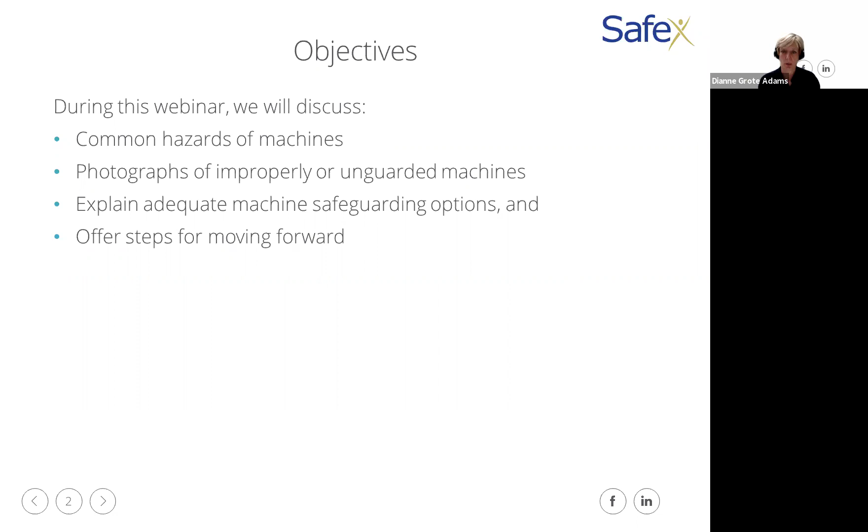But anyway, I'm going to hit some of the common hazards of machines. We're going to have some photographs of some unguarded machines. I'm going to run through the adequate machine safeguarding options, because I always get confused, what in the world is a safeguarding option? And then maybe some ideas to help you move forward. You know me, I always like to challenge you to do something.

So why should we guard? Well, obviously we're trying to prevent injuries and deaths, right? And there is a fair number: 800 deaths are attributed to lack of machine guarding, and more than 9,000 injuries. The other thing I don't normally talk about, because I don't do workers' compensation, but I thought was worth mentioning, we do have Ohio Administrative Code that actually lists some machine guarding requirements in the safety requirements for the state.

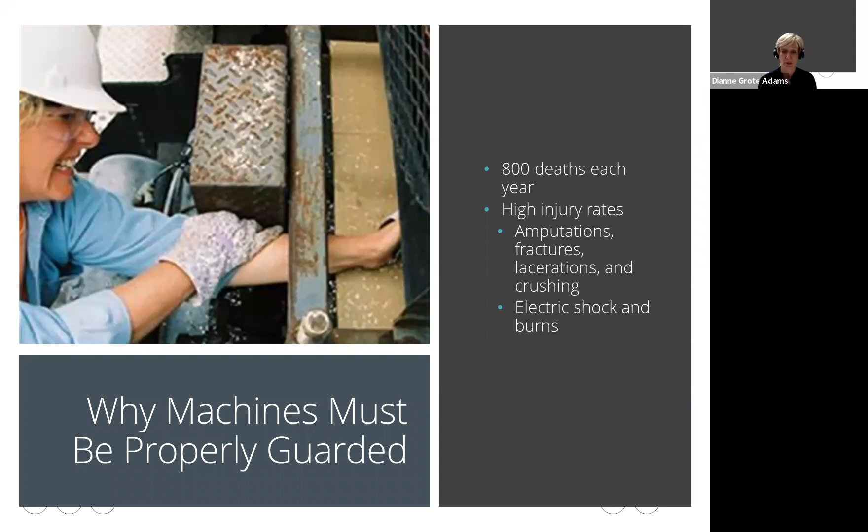Should you have a poorly designed machine and an employee was injured, there is that problem, that potential for a VSSR that could be filed as well. So there is a cost to this as well, beyond just the basic injuries.

But I'm going to focus today primarily on the OSHA standards, because you know me, that's what I'm all about, right? That and beyond just the OSHA requirements.

So 1910-211 gives you a bunch of definitions. I'm not reading them to you. 1910-212, though, is the general requirements, and that's what I'm going to focus on today.

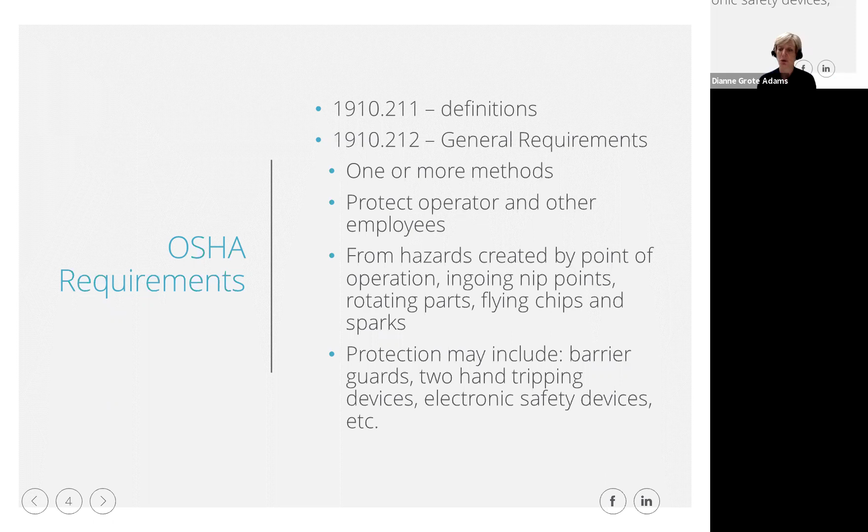They say in the OSHA standard, hey, we should use one or more methods to protect our workers. And we should make sure that we're protecting from any hazards created by point of operation, ingoing or in running, however you call that, nip points, rotating parts, flying chips, and sparks. And then finally, you can look at using barrier guards, two-hand tripping devices, electronic safety devices, a variety of things to make sure that we're protecting our workers.

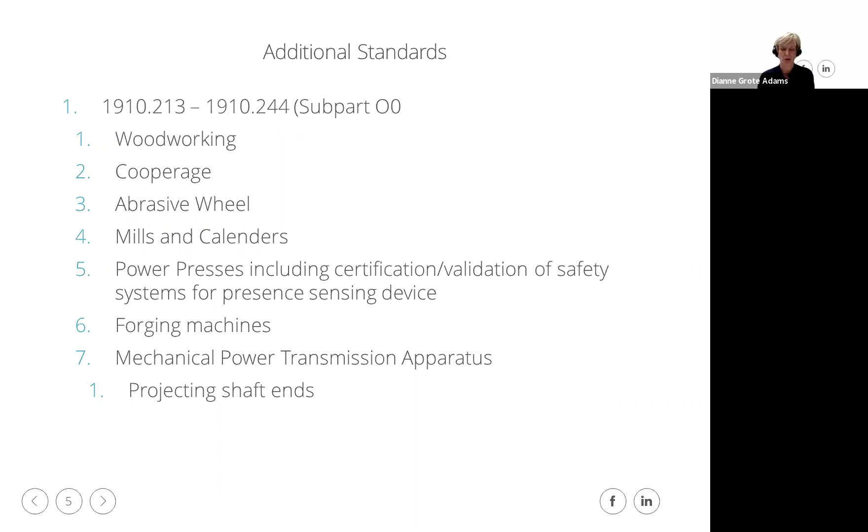There are some additional standards that are more specific. We're not going to cover that today, because obviously the BWC even offers machine guarding classes, and it's way more than 1 hour. So we're not going to do this, but if you have this equipment, you want to probably go look at those specific standards to supplement what I'm talking about today.

All right, so in the chat, real quick: if the machine is old or you're using it as the manufacturer sold it to you, is the safeguarding always satisfactory? True or false? Quick in the chat. Well, let me see what you think.

So if you've got an old piece of machinery that's been around since the company started, or you bought something last week, but this is the way the manufacturer sent it, it's always adequate, right? Correct. You guys are all good.

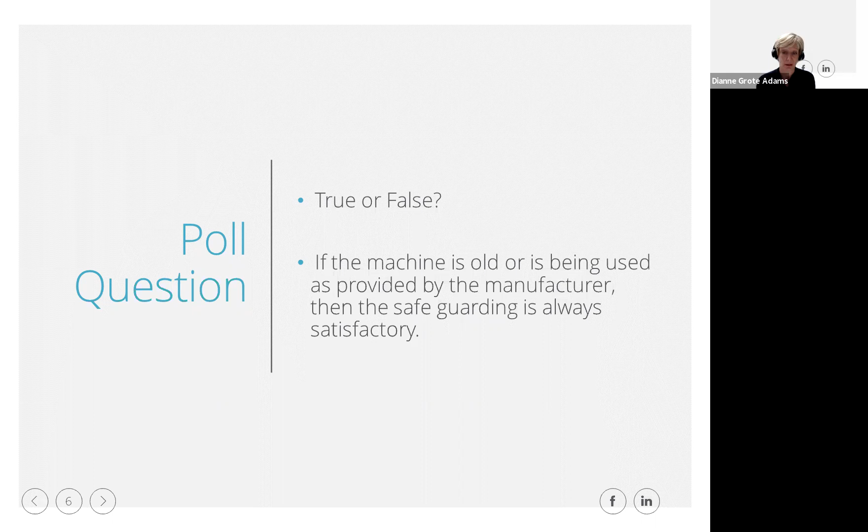False, false, false, false. OSHA doesn't regulate the manufacturers. And yes, I find that frustrating as well. But we all should know that it is our responsibility as the employers to make sure that our equipment is adequately guarded. And sometimes, depending on who's involved or the age of the machine, they may not have purchased the guarding package that comes with a piece of machinery.

So the part that always confuses me when I start hearing the terminology around safety and guarding is safeguards. What is the difference? So there are actually 5 different classifications that OSHA refers to, and that generally health and safety folks are going to refer to.

So we have safeguard barriers, which they actually prevent you from reaching the moving parts. And I think that's what most of us are more familiar with when we think about machine safeguarding.

But then you might have a safeguarding device, such as a pressure sensing device, like a mat or something that you would step on, that keeps the machine from operating unless that contact is being made, or sometimes in reverse, stops the machine from working.

We might look at location and distance, like I can't physically reach that, right? Like for example, if it's higher than 7 feet, we don't have to guard it because we can't access it. So that's location and distance.

Then we might have auto feed and ejection, where we actually have the machine automatically moving the part in and then ejecting the part so that the employee doesn't have to come in with contact with the point of operation.

And then finally, there's miscellaneous things like push sticks or other tools for putting equipment in, machine pieces in or out, and making sure our fingers don't get in the way. So that's the 5 categories that you ought to be thinking about when you're assessing the equipment in your plant: is the machine guarding or the safeguarding actually adequate?

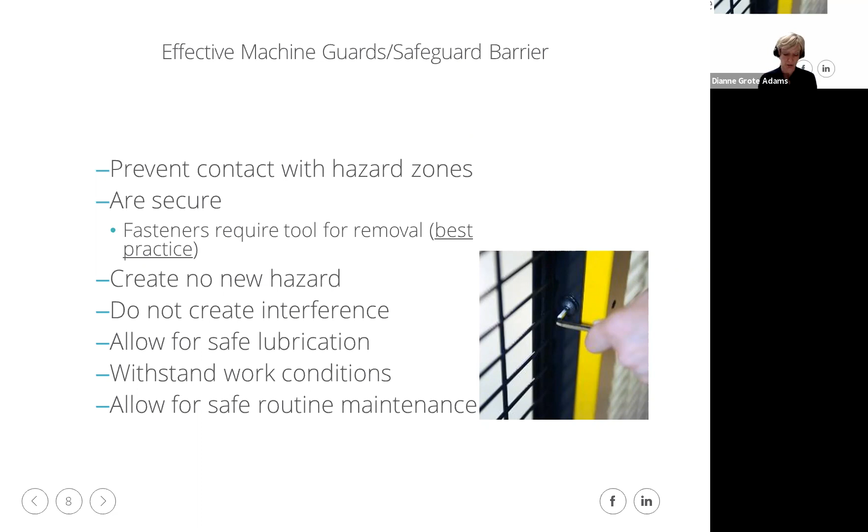And I see a chat that says thermal guarding from heat too. Absolutely, you can include that. Most of OSHA standards focus more on the mechanical side, but I certainly would include thermal guarding if I was looking at my machines for adequate guarding. Great question, Michael, thank you.

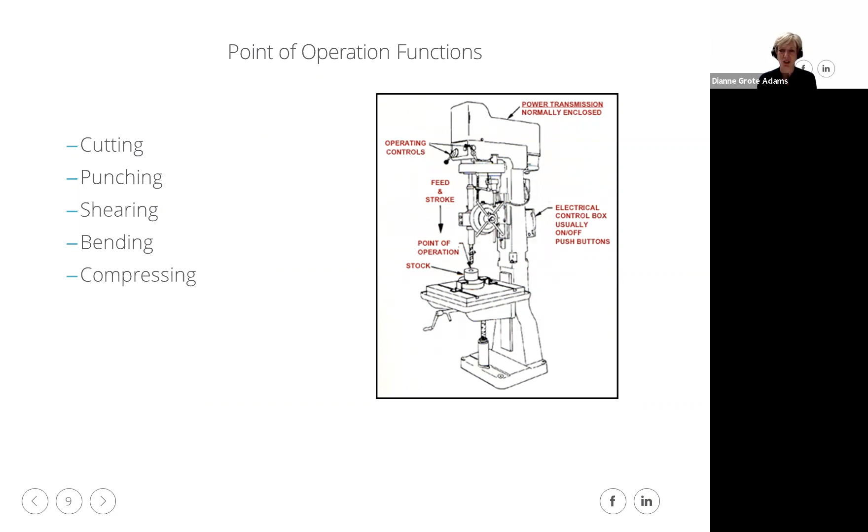So when I talk about point of operation, what does that mean? Well, it means the point right in the middle of the screen where whatever that machine is designed to do, that happens. It could be cutting, punching, shearing, bending, compressing. Those are all point of operation. I don't want my employee to get their hand in there — we don't want it cut, punched, sheared, bent, or compressed. Bad day. So we want to make sure the equipment we have prevents the employee from having access to point of operation.

So cutting machines, I think it's pretty obvious to most people what that is. Things like bandsaws and circular saws, lathes — probably many of us have those pieces of equipment, if not as part of your production, you probably had them in your maintenance shops where the maintenance folks are doing repairs for you or fabricating parts, whatever that might be.

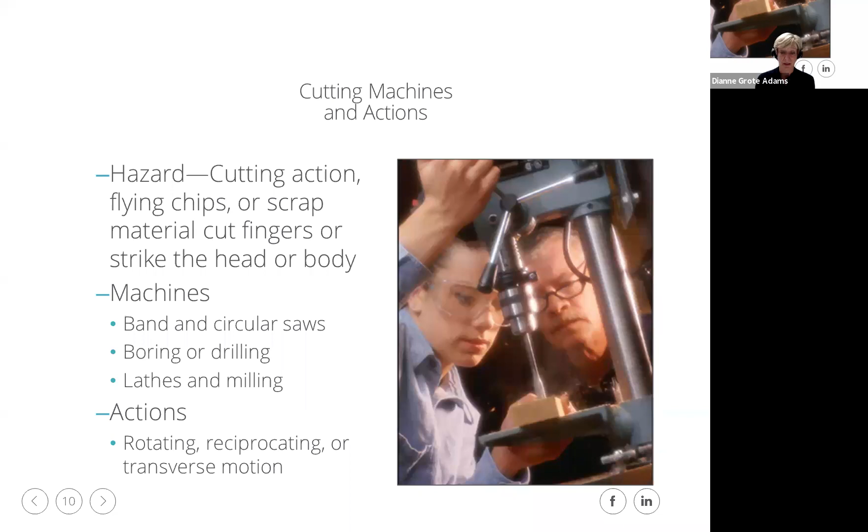So this is an example of a drill press, but there's no guard. Now I appreciate the fact the picture was taken and they put safety glasses on the young lady doing it to prevent her from getting particles in her eyes, but obviously there's no guarding around the point of operation, so her hands are at obvious risk. This is a relatively small part, so she's at higher risk than even a larger part where her hand wouldn't be as close.

A couple of other examples you can see in the center. I have an example of a bandsaw — that blade is not guarded. On the right is an example of a telescoping blade cover, so it moves up and down to allow you to get the piece in there, but covers that exposed blade. There's actually some consensus standards that define more information if you're interested, but we aren't going to talk about that all today. And then you might find something like what's on the left, where we have a much larger guard to cover the whole working area.

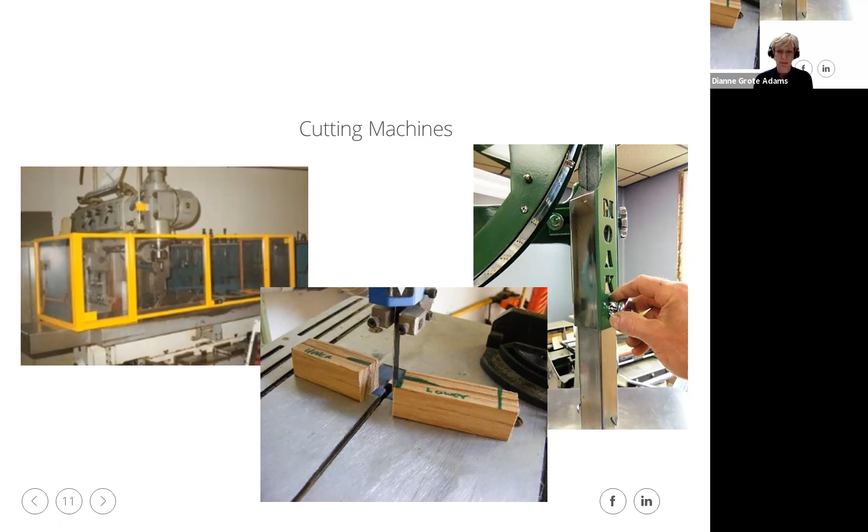In many cases like this, that guard will move, so I can get in there and put the piece in and out, but then it often will have interlocks — an electrical interlock that allows the machine not to operate until that guard's put back in place. So lots of options out there, but we need to find one that prevents my fingers from being able to hit that point of operation.

Milling machines are another great example of areas that I see lots of times that we haven't adequately guarded. One day I was doing a walkthrough in a facility and they had a couple of milling machines. The young man working had the guard up out of the way, had his safety glasses up on top of his head. And I was walking with the safety person who, for whatever reason, as we all know this is wrong, chose not to say anything to that employee.

And I said, I can't just walk by this and not say something. If you're not going to say something, you're condoning that behavior. So I asked the young man why he thought the guard was there and why he thought he had safety glasses. And he said, oh, in my last job, we didn't have to use those, so I just assumed we don't have to use them here either.

And so we had a conversation about what might happen, et cetera, et cetera. I'm not sure in that brief moment I convinced him. But I did challenge that safety person that they needed to be more diligent in having conversations about the requirements to protect their workers so that those individuals didn't get hurt.

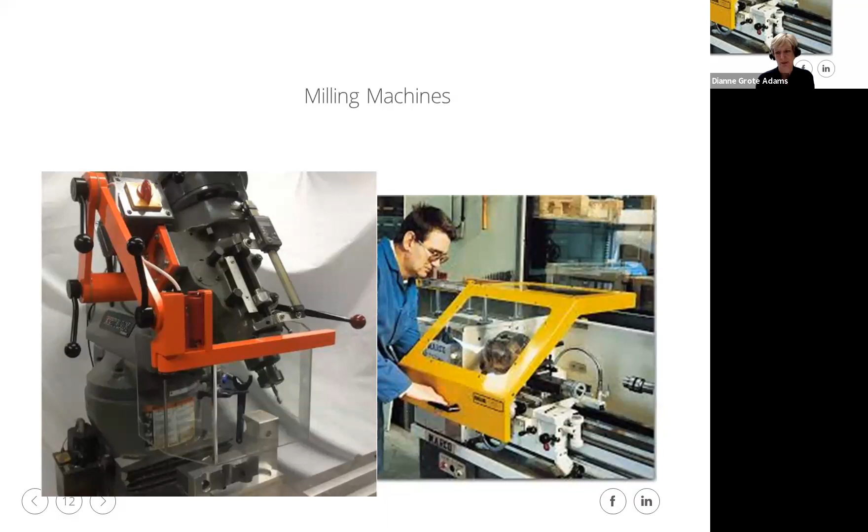So another lesson — don't walk by that, right? None of you would, I'm sure. But punching machines, obviously, I think that hazard's pretty apparent. If I got my finger in there, there's a lot of force that is part of a punching machine.

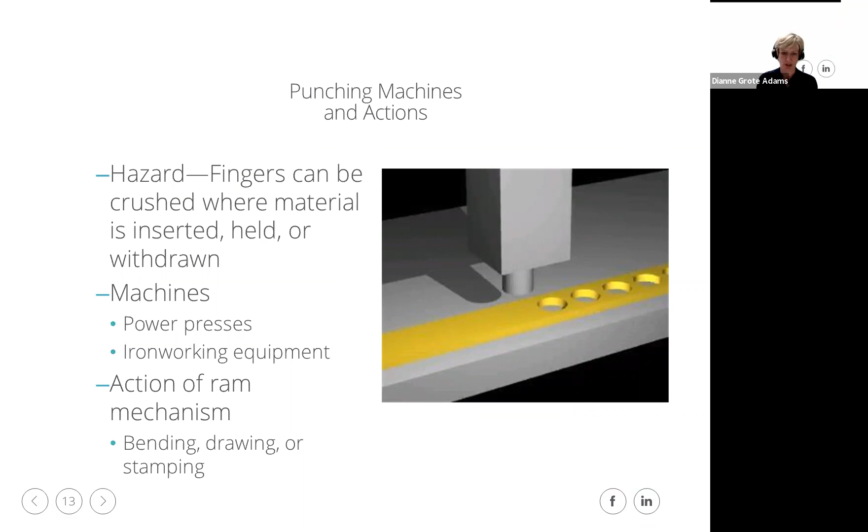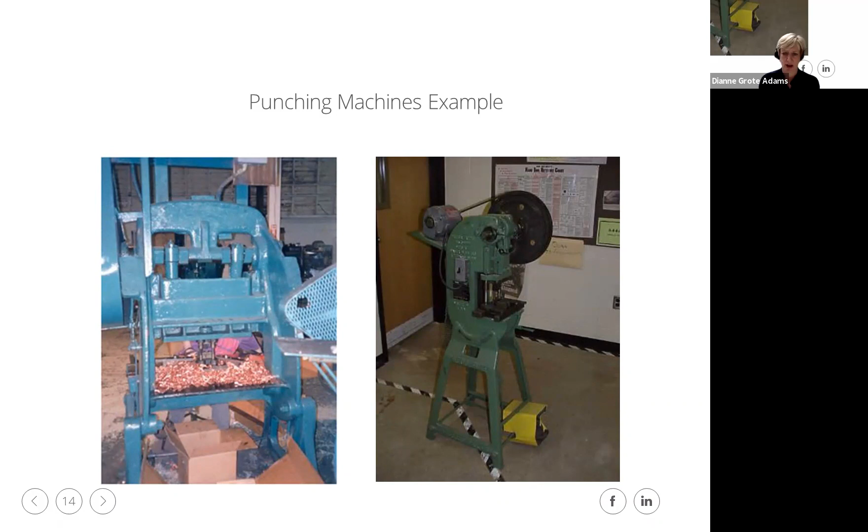When you take a lot of force in a very small area, it can do a lot of damage, and our fingers are at huge risk when we're holding parts and pieces in this particular example. These are some examples of a punching machine, if you're not familiar with what they look like. Again, we've got to figure out how do we guard this area where the point of operation is occurring, and what can we put in there to keep our fingers out of that?

Shearing machines are probably things most of us are very familiar with. They come in a variety of types: hydraulic, mechanical, and pneumatic. But again, they're cutting or tearing something. Obviously, if they're designed to cut or tear plastic or metal, they're going to go right through any digits that happen to get in the way.

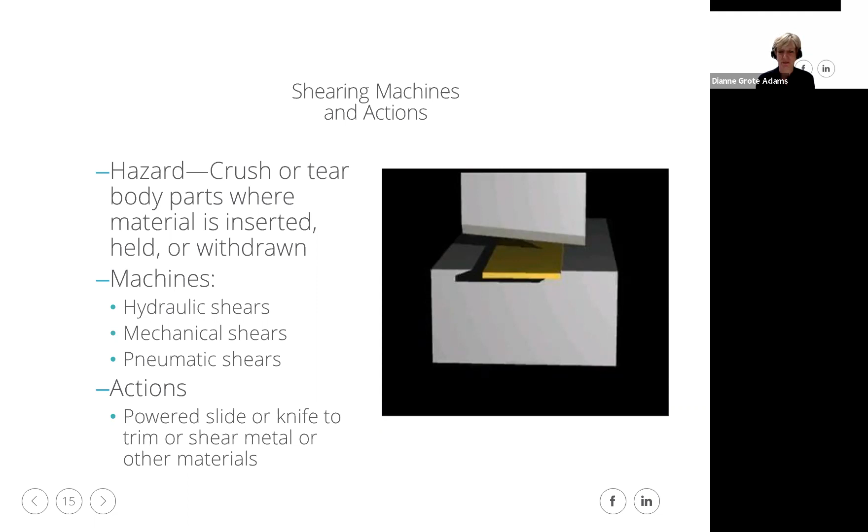So it's not a surprise that they're dangerous, but what I am always surprised by is people say, hey, I don't need to guard that because we hold the part far away and it's really not a problem. Well, they do make guarding for those. These are the things I usually see on old machines, because they last a really long time and companies have them, but they haven't upgraded them to make sure they have adequate machine guards. So if you have any of these, reach out to your original manufacturer to see if they have guarding additions, or go to some vendors that sell guarding.

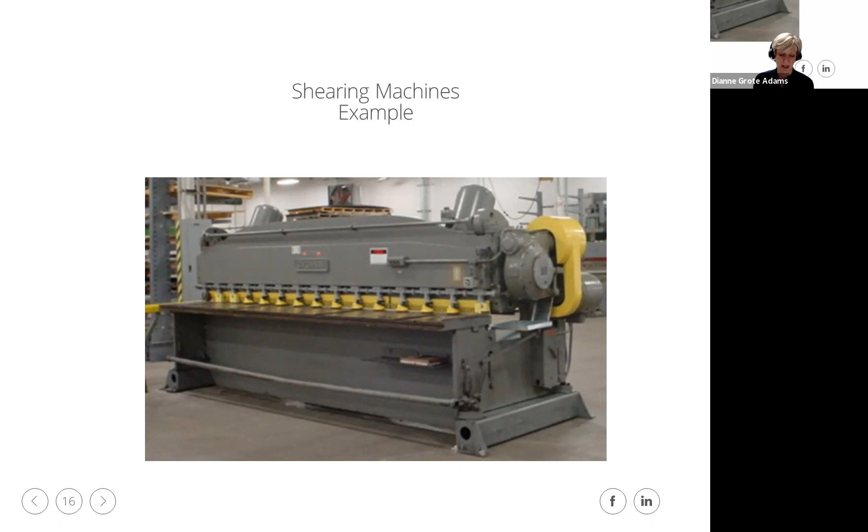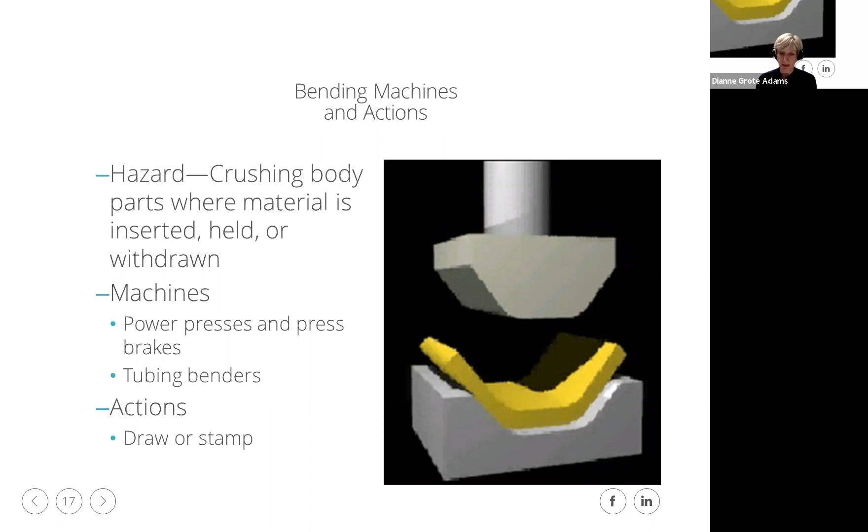Bending machines also have a high point of operation, with high force, just like some of the punching machines we've talked about. Tube benders and power presses are examples of bending machines. Power presses have their own safety standard in addition to this general one. We're not going into the details of that today, but if you have power presses, make sure you take a look at that as well.

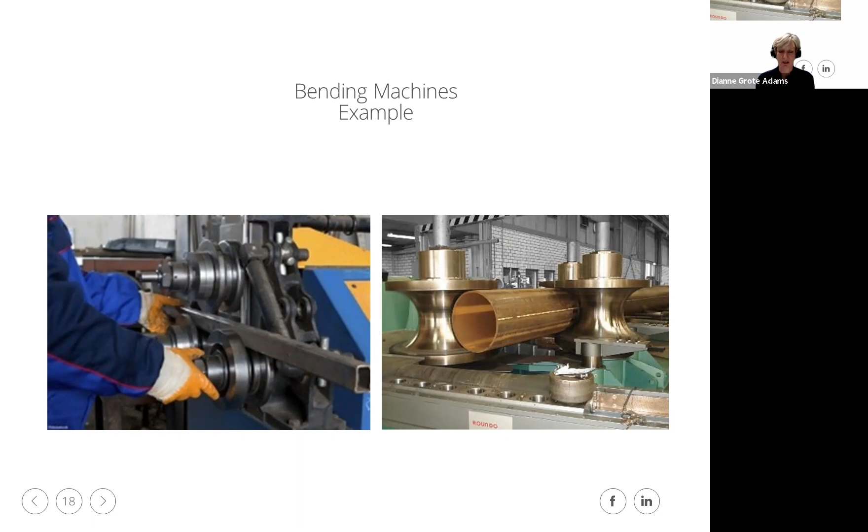Here's an example of some bending machines. You can see the equipment on the left goes in between those wheels and then gets bent, and his fingers are really accessible to that point of operation there. Then we have a bigger machine on the right. These are all examples of things we need to evaluate—what's the best way to safeguard our employees so they don't get their hands in the bending machine?

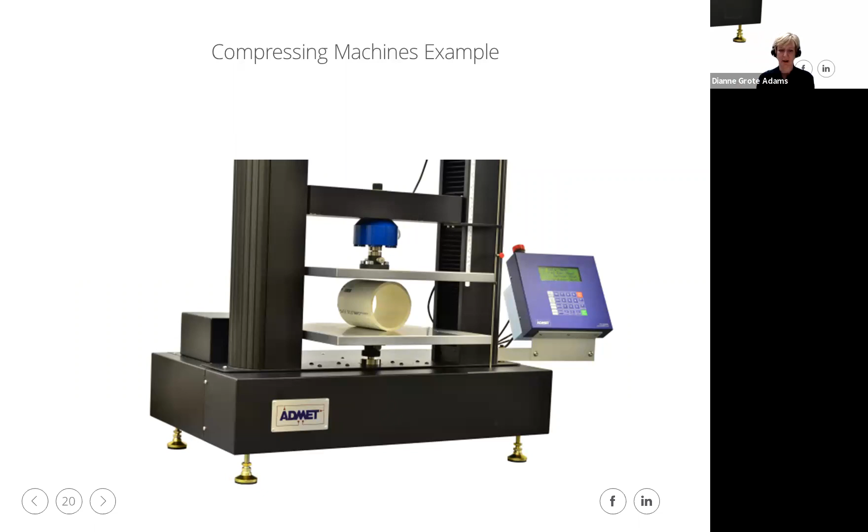And then finally, we have compression machines—again, another high force deal. You can imagine if this is going to squash this, how it might actually create a lot of force on that person.

I love this one because there are so many examples of different kinds of machine guarding being used in one piece of machinery or one set of lines. A lot of the things I just ran through were single point of operation, single guards needed. Well, here's a more complex activity, the horizontal injection molding, and you can see we've got 10 different guards being utilized here in order to protect the worker.

It starts with movable guards, say over here, so they can put the equipment in. They have an operator gate, number 3, that slides back and forth so we can get the parts in and out, but it's also interlocked so the machine can't run if that isn't closed all the way. Down here at number 9, face shields are another form of safeguarding from parts. And number 10, they actually have an electrical cabinet that guards the machine's electrical system. In this case, it's just a matter of taking time to walk through the machine, look at where all the hazards are, and identify whether we've adequately protected our workers from reaching in and coming into contact with any moving parts or the point of operation.

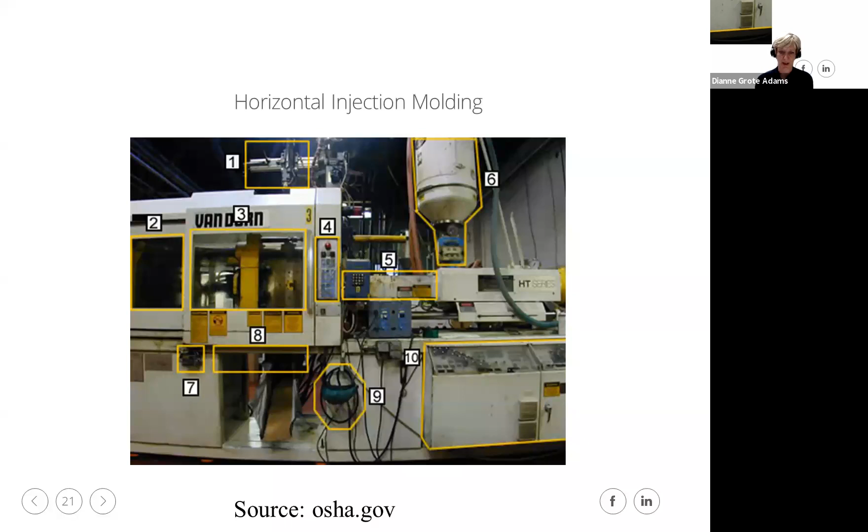This next slide is a close-up of that machine, just to give you another example or a closer view. You can see up there at number 1, there's a guard to control access to the machine and the material being fed down in. A close-up of number 2, that sliding door I was telling you about. And then number 3, there's also a movable guard that prevents access to the clamping and ejector mechanisms used to eject those parts out of there. So a lot going on in one piece of machine.

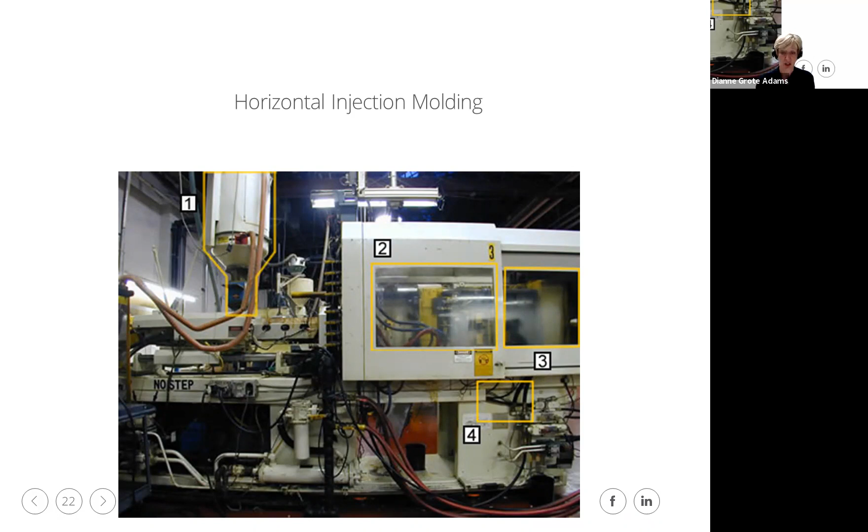So you can see machine guarding can be quite a challenge if we have a more complex operation.

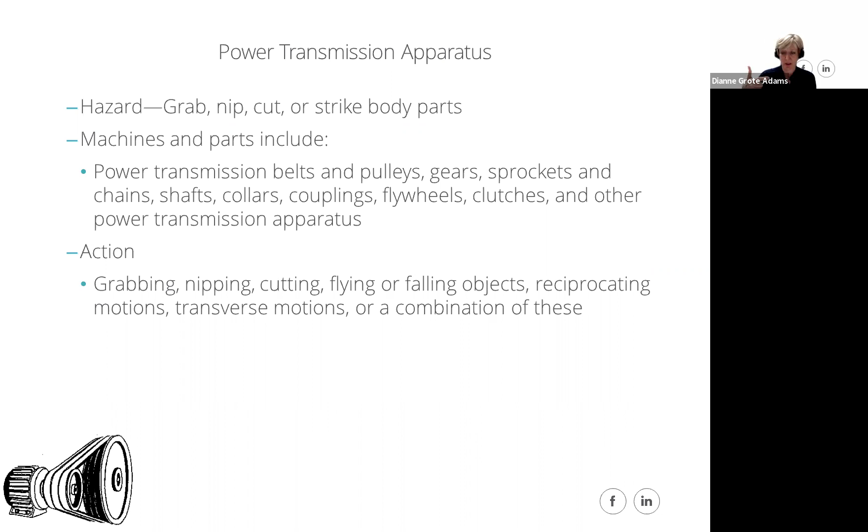All right, let's talk a little bit about power transmission apparatus, because most of us have some type of power transmission apparatus in our facilities. That's one that's pretty common. So we're talking about when you have pulleys or gears or sprockets or chains, something that's making a machine turn. Obviously, if those aren't guarded, you can get caught in those. You can get pulled in just from the friction between the two parts, or sometimes when you have gears, it can get caught on the gear.

So these are a couple of examples, and these need to be guarded. A lot of times I see people so focused on the point of operation on the equipment that they tend to forget these. Or this is often a place where the machine guard doesn't get back onto the equipment after a maintenance activity.

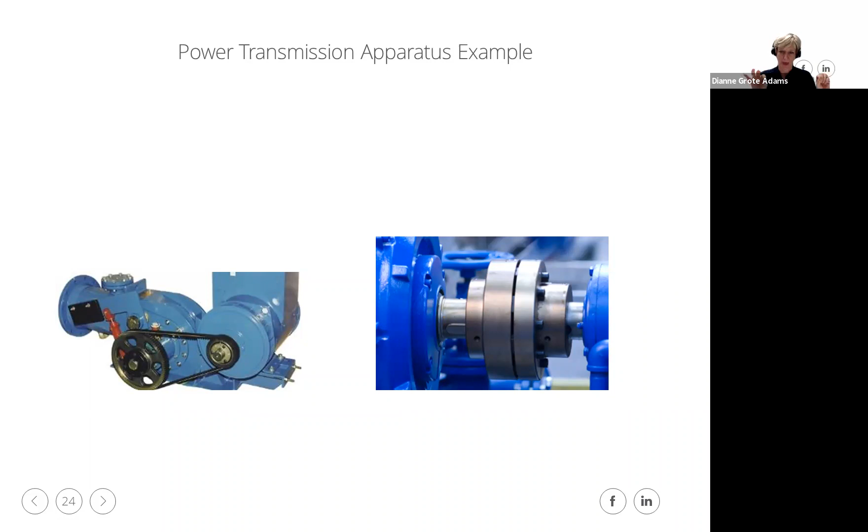When these guards are in place, you want to look really close. I find a lot of opportunity where the front facing piece of the guard looks ideal, but if I put my head over the edge, not my fingers, I can see that if I was to put my fingers there, I could have gotten them caught in the rotating parts. So you want to make sure those guards fully enclose the hazard that is present, and if you're using a wire mesh, that the openings are small enough that we can't get our fingers in. So a lot to look for, no question.

There are other things we call in-running nip points. Power apparatus fit that definition, but sometimes just the process you have itself might create pinch points where there's an in-running nip point, where two rollers are coming together and they could catch someone's fingers or pull their clothing or hair in.

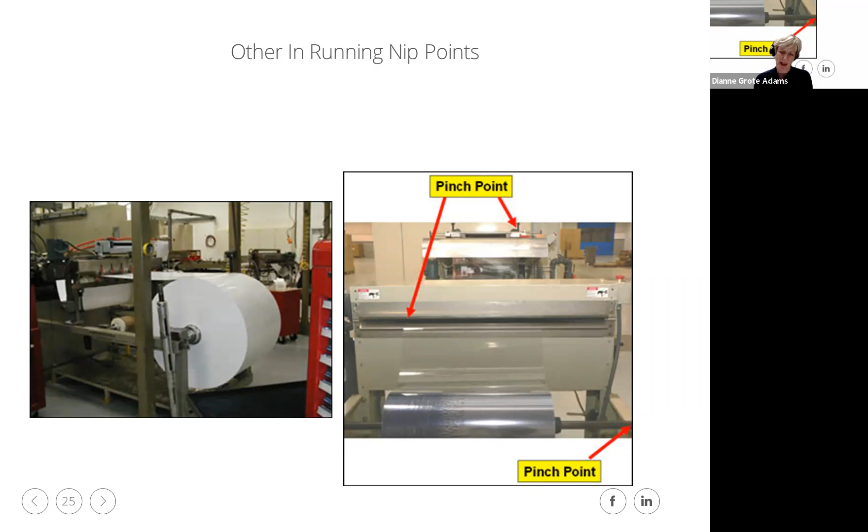I'm not going to share all the horror stories I hear of people telling me about long hair that's gotten pulled in, or a sleeve that's gotten pulled in. It's a horrible discussion because this equipment is so powerful that the resistance created by a sleeve or hair getting pulled in doesn't slow the machine down. You can just imagine the damage that creates for that individual who gets stuck. So really looking at how do you keep access to these points away from your employees.

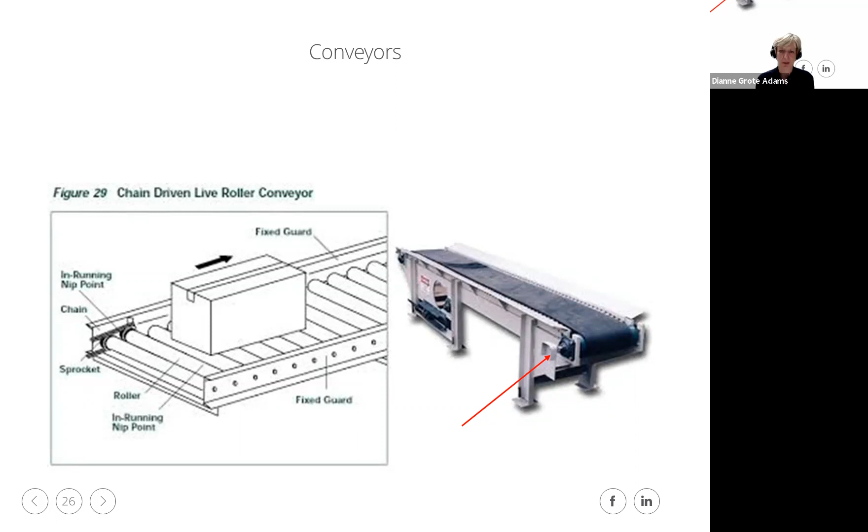Sometimes you might have a conveyor that's designed to be very loose, so it doesn't create the hazard that some of the more tight-fitting ones do, but you want to make sure you've checked how you might prevent employees from accessing that. I know a lot of times people say, well, the conveyor won't work, but I have seen solutions - sometimes it's just a small metal plate that prevents that access, or a small plastic cover. So there are opportunities out there, it's just sometimes you have to be a little creative or look a little harder.

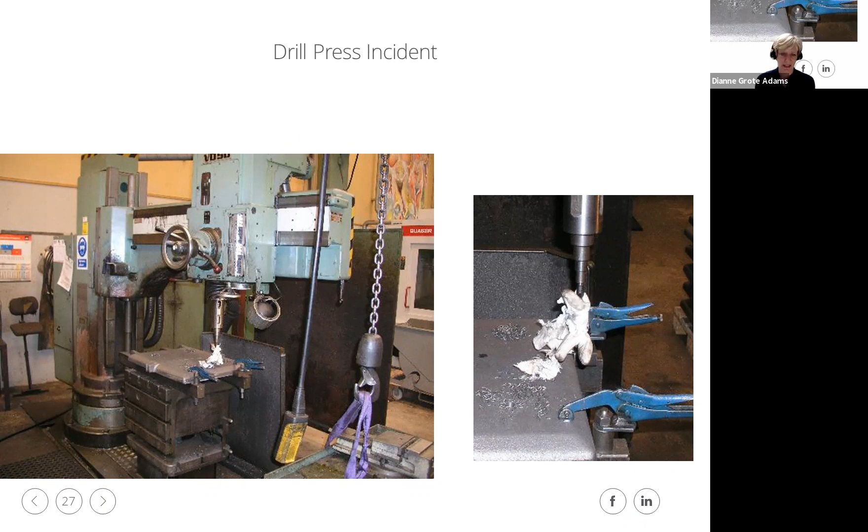This was an example of a drill press incident, and we're going to talk about administrative controls in a little bit, but this is an example of when you should or should not wear gloves around equipment. This individual's hand was pulled into the drill press because it wasn't adequately guarded, and they were wearing PPE, loose-fitting gloves, and it actually pulled their hand into the drill press - you can imagine the damage that was done.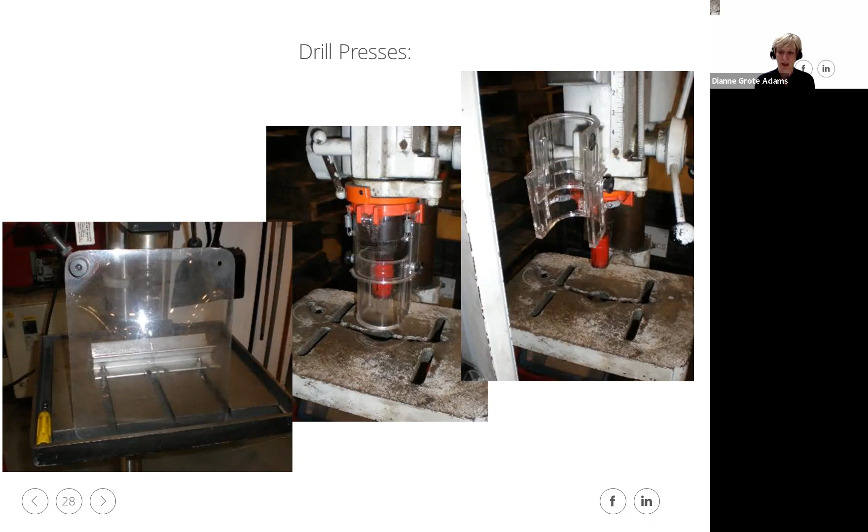Some examples of guards that could be used on a drill press would have helped prevent that. Obviously, the right hand telescoping adjustable guard is a much more effective guard than the one on the left, which only prevents access from one direction. So these are things you want to look at too when you're assessing your machine guarding in particular.

Now, I will challenge any of you - if you are so disciplined that you never find this in your maintenance shop, you deserve a huge round of applause.

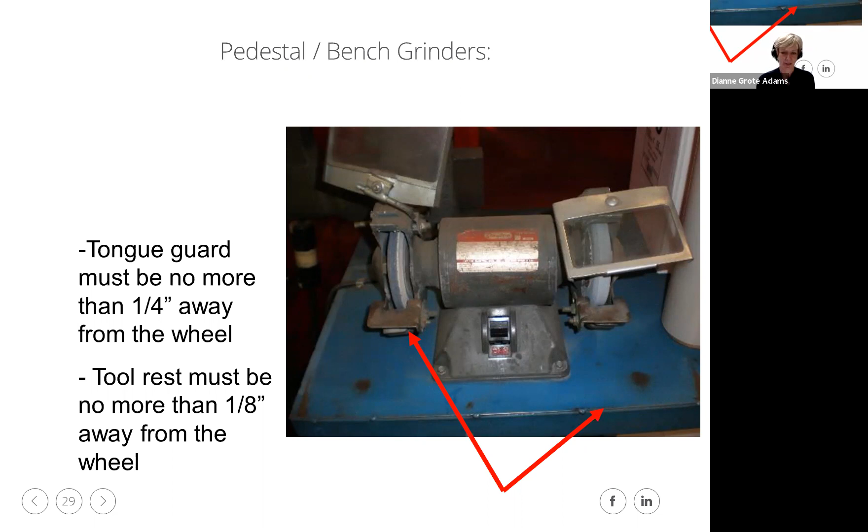Almost anywhere I can go, I can find a tongue guard or a tool rest that are not adequately adjusted. At the end of today, I'm going to show you a couple of tools you can purchase to measure those. So what I've suggested to people is buy one of those tools, put it on a chain, and keep it right there next to your grinders so employees have a way to quickly measure: Is the tongue guard adequately adjusted? Is the tool rest adequately adjusted? Hopefully that tool reminds them to check that every time before they use it.

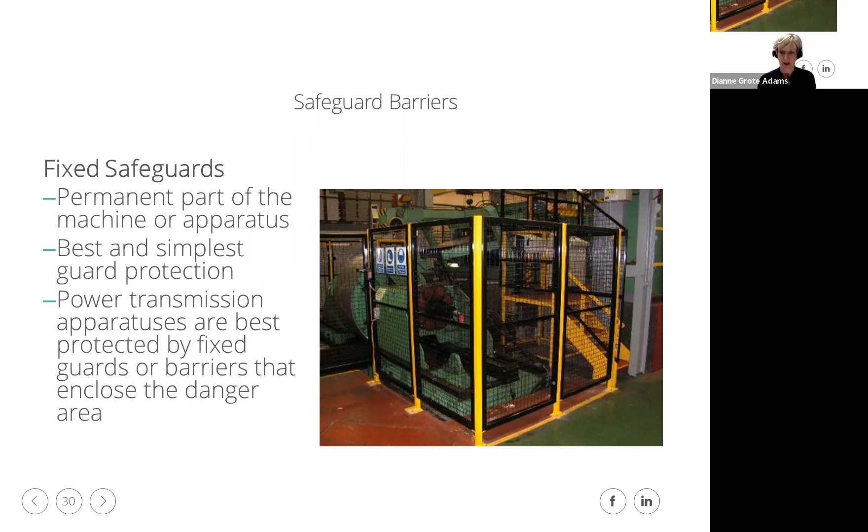So then safeguard barriers are becoming more and more common. People are finding that rather than investing in individual guards on a piece of machinery, let's go ahead and barrier off the entire area. I'm finding a lot more use of wire mesh gates like these around large pieces of equipment, which allows the heat to dissipate more from that equipment. If people don't have to be in there on a regular basis, this can often be a less expensive, less cumbersome solution to some of your machine guarding options. These are usually interlocked, so if someone opens them, the machine has to shut down. But it allows for easy access for maintenance and for operators if there are jams to clear. So a safeguard barrier like this, in conjunction with interlocks, is often a very effective machine guarding solution.

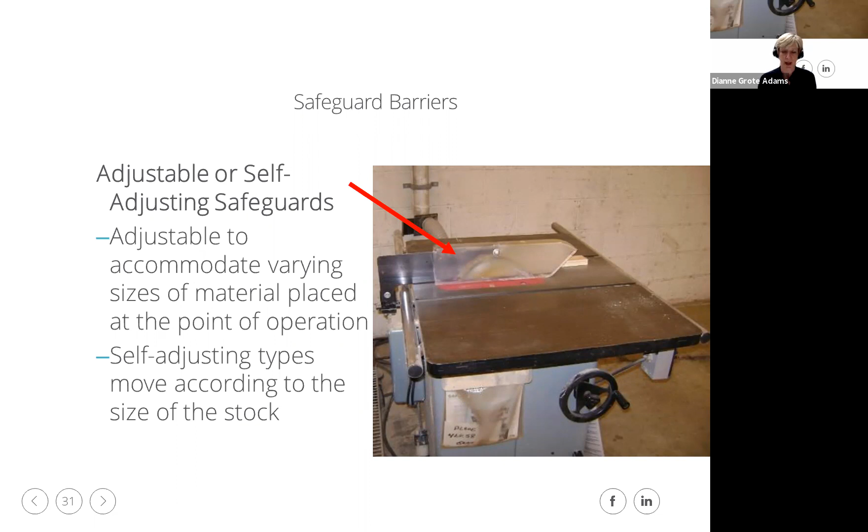There are also adjustable or self-adjusting safeguards, like on this particular saw. It adjusts to different sizes of materials you're using, which is often the complaint I hear from maintenance — that they're doing all different sizes. So there are adjustable guards that will accommodate different types and sizes of pieces that you're cutting.

Here's a couple other examples of the bigger interlock safeguards that I often see when I'm out and about. These larger types of guards seem to be becoming more popular now. Yes, there's an initial cost up front, but I think the maintenance of them, the clean look they give the plant, and the protection they offer is often becoming very valuable and worth that upfront investment.

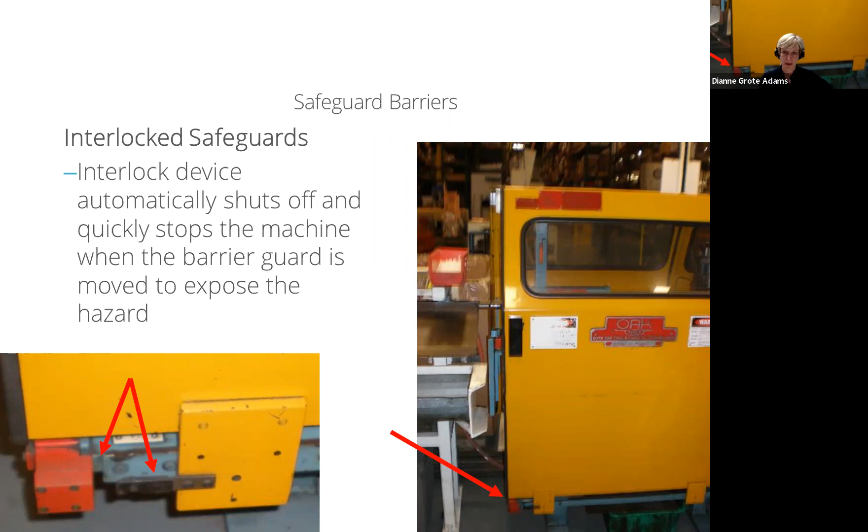And again, the interlocks that are checked in there. Now, I will challenge you — if you are depending on interlocks as safeguards, I hope you have some kind of preventive maintenance program to check and find out if your safeguards are working properly. Are those interlocks being checked?

So again, back to chat real quick — Deb shared, hey, bench grinder guarding is low hanging fruit for OSHA. Oh yeah, it is, because it's easy to find and it happens a lot, doesn't it, Deb?

All right, so how frequently are you inspecting and documenting your safeguards on your equipment? Is it monthly, quarterly, annually, periodically, or are you not even sure you're checking?

The power press standard has a very specific requirement, but beyond that, I think it's just really good practice to make sure you're doing these inspections. I think it enhances the awareness of the need and helps employees understand the importance of using the guards and putting them back, as well as being a good way to make sure you don't have injuries and can demonstrate internally that you're compliant with the standard.

All right, not very many people are answering, so I'm going to guess that maybe there are some people who don't want to admit that you're not doing inspections, and I get that. So I would suggest that if you don't have some routine inspection of your equipment safeguards, that becomes something you start doing.

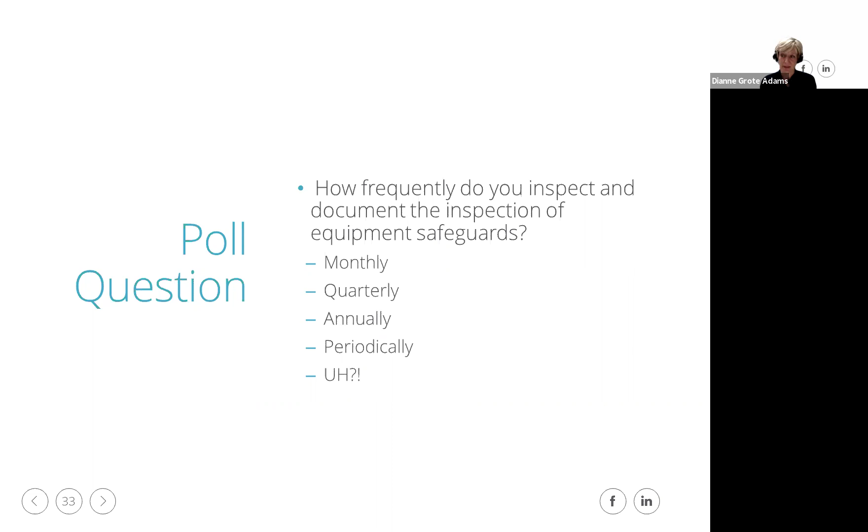Some people I know do it as an employee starts a machine up in the morning — that's part of their JHA, to check the inspection of all the safeguards. Some people might have maintenance doing it as part of a preventive maintenance section. Some of you might have safety walking around doing it. I would just propose that some routine inspection is probably worth it, because machine guarding can be removed, and sometimes it's months before someone recognizes that perhaps it was moved.

All right, I'm doing pretty well. I knew I had a lot of material for you, and like I said, I tried to cut some out, but I just felt I would not do good service to the topic if I cut any more out.

So those were your safeguard barriers. That's what I think most of us are most familiar with when we think about machine guarding or protecting ourselves from machines. So that was the first part.

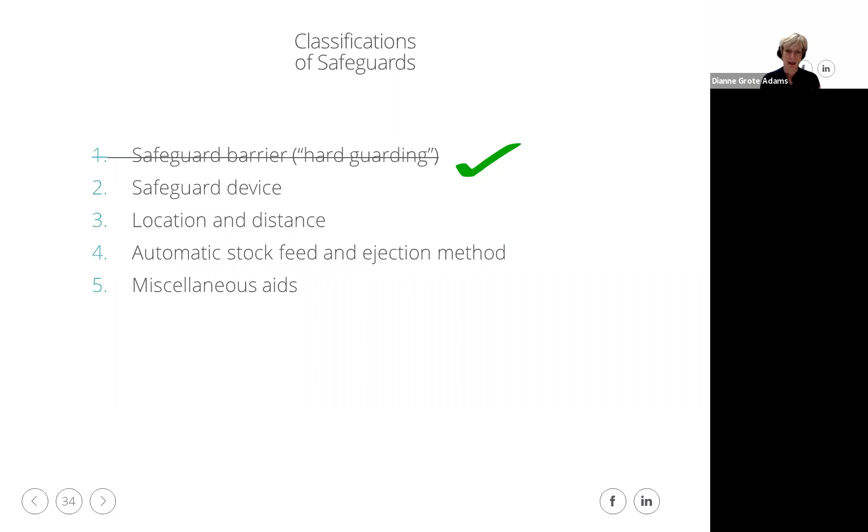Now we've got three or four more to run through, but they're not as complicated or as broad of a topic. Sometimes you might find that we can use safeguarding devices. They can be presence sensing devices that shut the equipment down, such as photoelectric, radio frequency, or electromechanical. Again, those types of things really depend on some type of preventive maintenance program to make sure they're not going to fail.

You might find that those are often pressure sensitive devices, such as standing on a mat that then communicates with the machine.

Sometimes pullbacks or restraints are used. That used to be a primary means of machine guarding back when I first started in the business. Fortunately, we're not limited to that anymore. There are still some places I see using it, but other options have been integrated since then.

And then you might have a safety trip control where if I get too close to a machine, as I move close, maybe my hips touch something, it trips the machine and the machine shuts down.

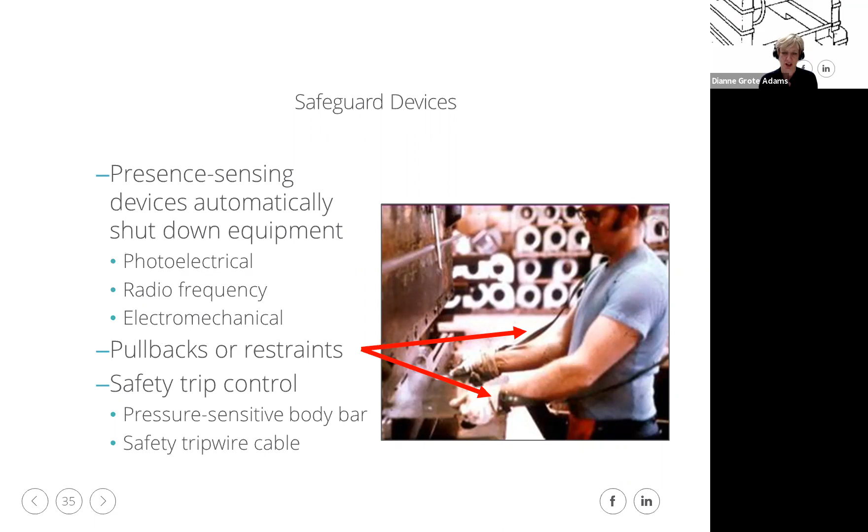We also might find two-hand devices where you have to put two hands on buttons to make the machine rotate. That means my hands are out of the way right before the operation occurs.

I have unfortunately seen people being creative and sliding a piece of wood or rebar or metal onto one of the control panel buttons that holds it down, so they still only have to use one hand. They say it's quicker. However, obviously it's defeating the whole purpose of having two hands pushed down so that I make sure both of my hands are out of the way of the point of operation.

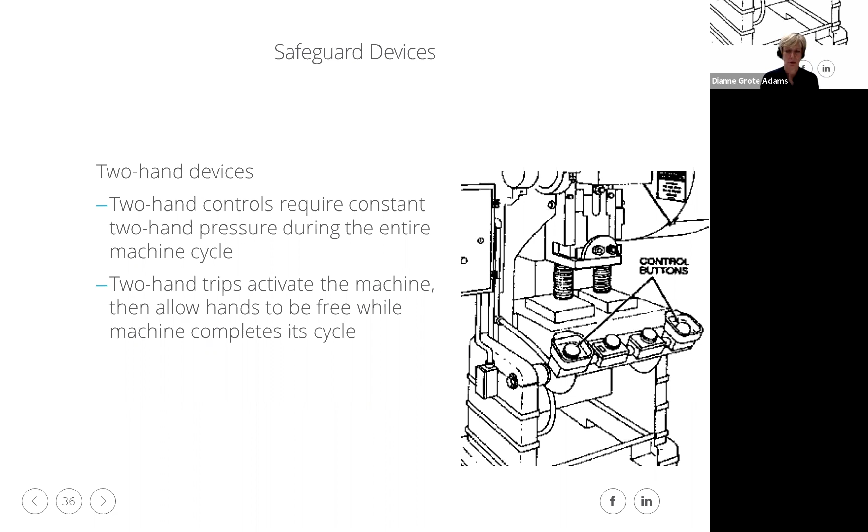So if you have these, I would challenge you to make sure that people aren't finding shortcuts in order to meet production quotas when they're trying to get things done.

This is often an area of guarding with a pedal. Let's say my pedal is depressed to rotate the machine. So I'm consciously making a decision to activate that machine. My hands are back, I step on that pedal. Usually these pedals are far enough away from the machine that I can't get my hands in when I do that.

A couple of things I've seen happen is people move the pedal closer to the machine so they don't have to step back so far and save time. But again, that defeats the purpose of being far enough away to keep your hands out of the way. So I think these need to be bolted to the floor so they can't be moved closer. I've also seen the top of those get damaged from forklift traffic. And then obviously the operator of the machine is working around some safeguarding in order to make the machine still work, even though their foot guard may have been damaged or maybe even is now non-existent.

So again, something to check for as part of your weekly inspection.

New and improved, right? While I've been in the business, light curtains have started to replace the old pullbacks from your hands. Light curtains use a source on one side, a receiver on the other side, and that light goes across and is received.

If it's broken, so something gets in the way, it shuts down the machine. It is a great source of guarding and keeping people away from the point of operation, but obviously the curtain has to be far enough away that by the time the machine shuts down, when I break that plane of light, I can't get my hand into the point of operation.

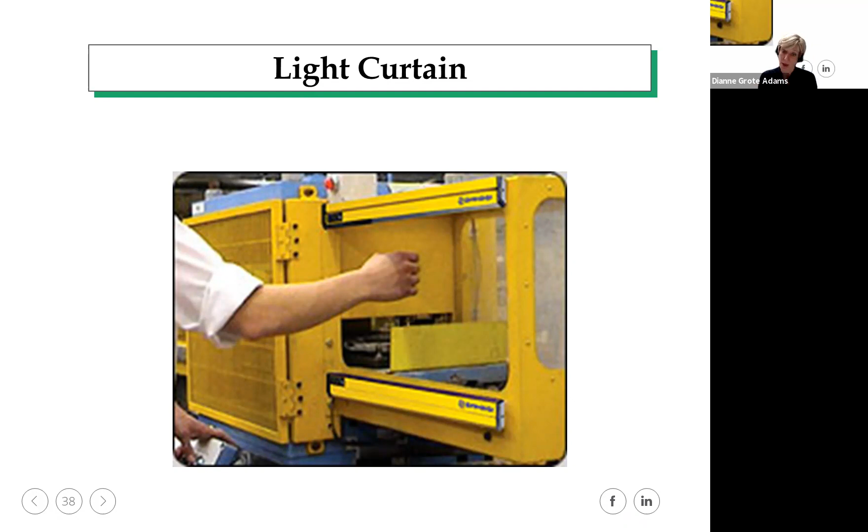So that distance it has to be is usually based on the machine's stopping ability—how fast it can stop if we power it down—and then the distance between and sensitivity of that light. You cannot use these on full revolution mechanical power presses though, but for other types of machines, it works pretty well.

And then there's always location and distance, right? If we can eliminate or get our employees away from the hazard, that's always a benefit to us. So in some cases, we'll put the control panels far enough away that they can't possibly get to the operation.

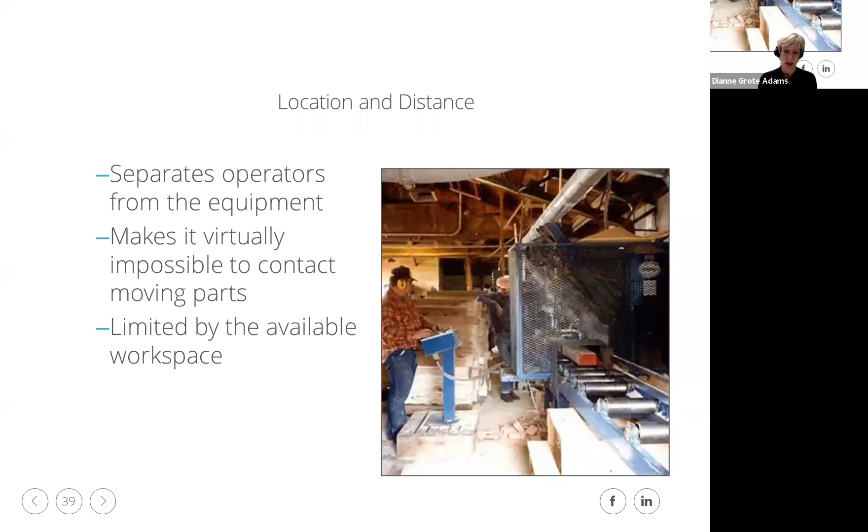Sometimes you have to be careful because if other employees are in the area and you haven't adequately guarded this, or the barrier across the front isn't large enough, you might have secondary employees, not the operator themselves, but others who may be at risk. So consider both if you're thinking about location and distance as your source of protection.

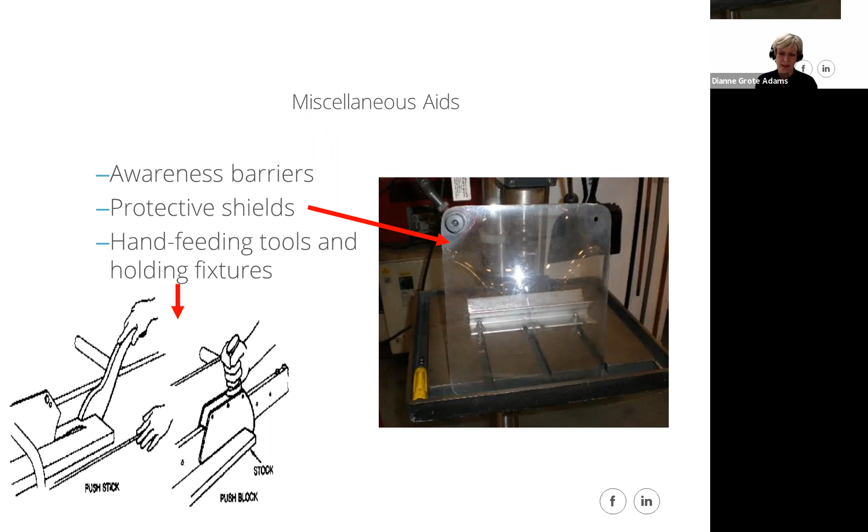Then there are other miscellaneous aids we can use: barriers, protective shields of some sort, tools so we can move the parts without getting our hands in there. OSHA says any of these are acceptable, and in many cases you're going to use a combination to protect your workers. A combination is often the best option, because any one particular safeguard isn't always the total solution.

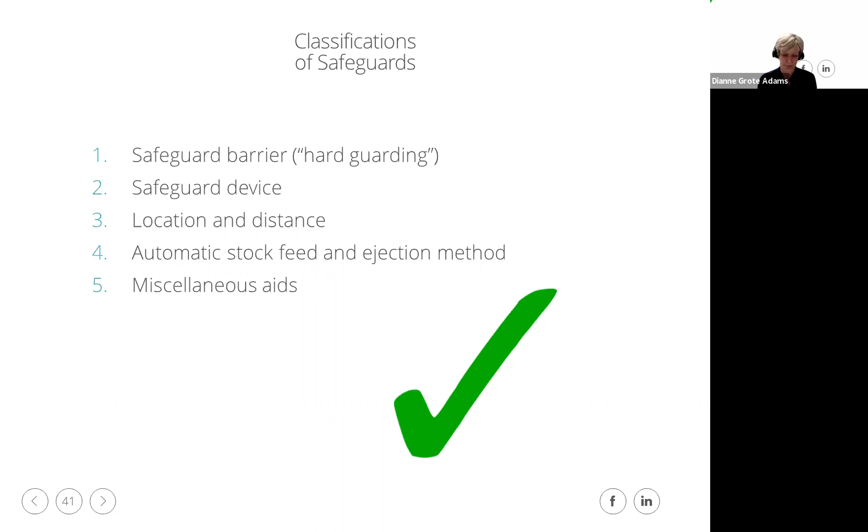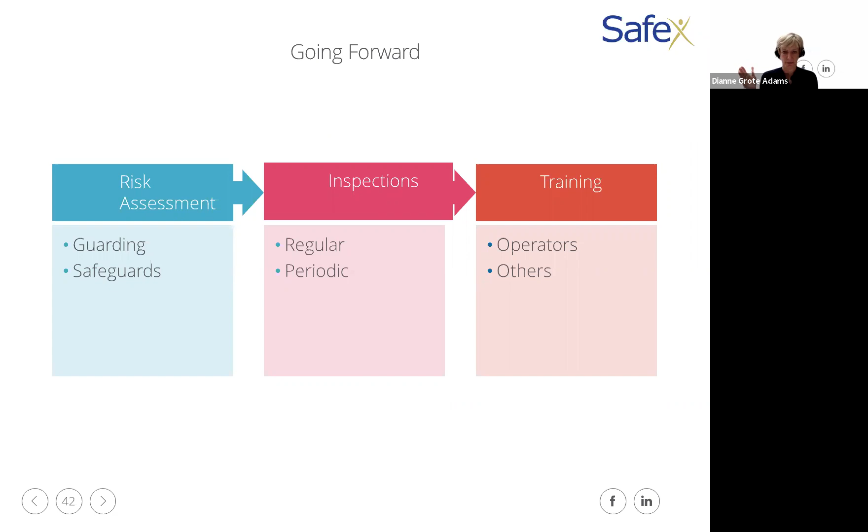So having gone out and done your assessment, one thing I'll suggest is putting together a machine guarding program. While OSHA doesn't require a written program like for hearing conservation or silica, I think a machine guarding program is a good addition to your safety program. That would include how you do a risk assessment, how often you're doing inspections, and what kind of training you've done. If you're doing those three things, I think you'll be pretty effective at controlling hazards from machine guarding.

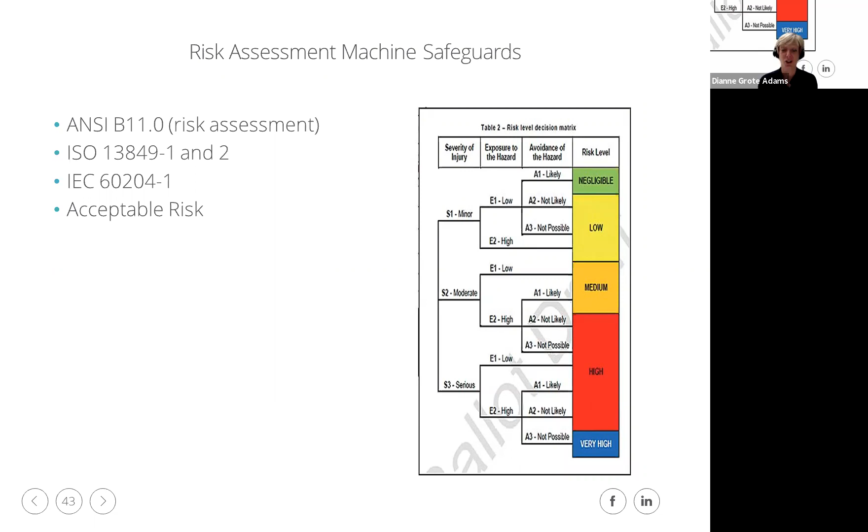If you're in a big company with a lot of machines that need guarding and you have to do budget justifications, having more data for a specific risk assessment rather than just professional opinion is really valuable. You can also call Carrie, Deb, and Nick to come out and help you do this, giving you a second professional opinion—I encourage that, because we're blessed to have the BWC folks as a resource here.

Then I'd look at what your program says about periodic and regular inspections. What equipment are you going to inspect, and how frequently? It could be all of the equipment, it could be your auxiliary equipment, or equipment that's in a locked room or on an elevated work area.

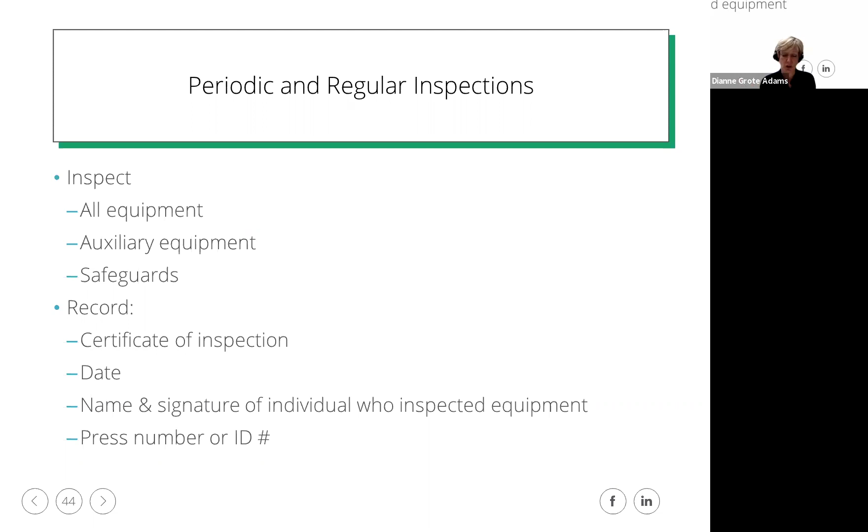When you look at those areas, they may be locked with limited access, so you might treat them slightly differently for an effective safeguard than areas where employees are working all of the time. Your records should say: here's the inspection I did, the method I followed, what date it was, who did the inspection, and keeping track of the equipment number.

One area worth noting, if you're doing a less data-driven risk assessment using ANSI or ISO, is to go out and look at where people might be at risk. One thing often recommended is to look at the vulnerable neutral body parts—from mid-thigh up to the belt buckle, that yellow band you see on the slide. Even though people are different heights, that band covers everybody from thigh to belt buckle, and it's a good place to understand where we're at greatest risk because our hands are moving in there and there's more action going on.

Also look below that, from the knee to the top of the foot. Those are places we're not looking at as often, and there are risks when machines aren't adequately guarded in that lower region, because our legs may come into contact with those things.

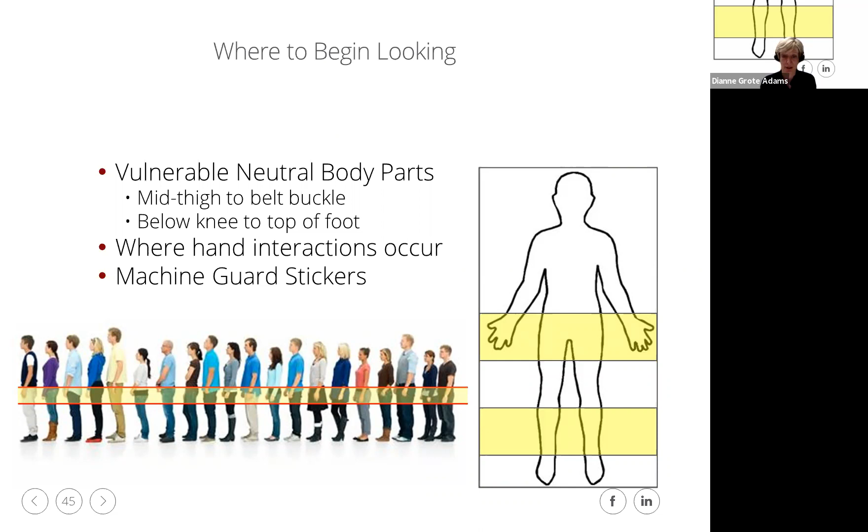Some people like to put machine guarding stickers to remind people that this is a machine guard. I think anytime you're using some kind of reminder like a sticker or sign, they work very well for a while, but like everything, we become immune to our surroundings if they've been there in our face all the time. So they can be mixed benefit, but sometimes people find them very useful, particularly if you're educating employees about what to look for.

A lot of people have names for this thing called the OSHA Guard Safety Scale. Some people call it the gotcha stick, some people call it the machine guarding ruler. But if you don't have one of these, I would encourage you to get one.

They're really valuable for making sure, when you're doing those risk assessments, if your access to the point of operation is adequately guarded. So you can imagine, the lower my guard is in front of that point of operation, the less distance I need to keep myself away because I can't get my fingers in. If my guard has openings, then how far is it from that machine guard to where point of operation occurs? This OSHA Guard Safety Scale helps you measure that and make a decision if your guarding is adequate to prevent access to that point of operation. So I think it should be in every safety person's toolbox.

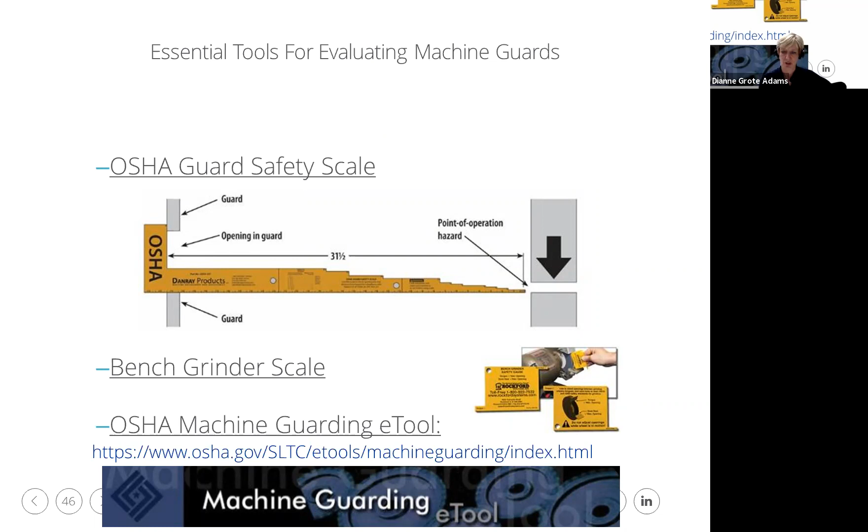And then the next one would be the bench grinder scale that I mentioned earlier. I have a bigger picture coming up so you can see that. And if you've not gone on OSHA's website and used their e-tool under machine guarding, I think it's pretty decent to help you make some decisions.

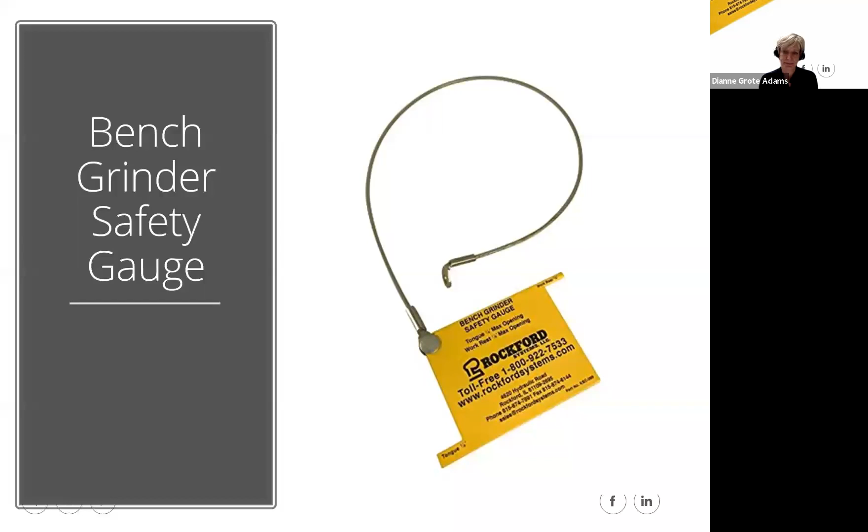So here's your bench grinder safety gauge. This is the one I was talking about, and you can see that it has the tool rest and tongue guard measurements. If you had one of these next to all of your bench grinders, it's a great awareness for maintenance team members to double check the tool rest and tongue guard, make sure they're adequately measured, and you can tell from sticking that tool in there if they're close enough. So it's a good reminder and a way to measure. I think if you had those, it might help eliminate some of those easy things OSHA can catch, or someone can honestly get hurt, which is more important.

All right, one more poll out of curiosity. Get ready to put your answers in chat. How often are you training your operators on the safeguards of their equipment? What they should be looking for, how they work with that guard, like why shouldn't I put the top up on my lathe. Are you doing training, and if so how often? So my question is, do you do it as part of orientation or onboarding? Do you do it annually? Do you do it after an accident, or do you not really have anything formal?

So I got one at orientation. Anybody else, are you willing to share? Because everybody likes to know what everybody's doing. All right, so we've got orientation, if you have an accident orientation every 6 months, so orientation.

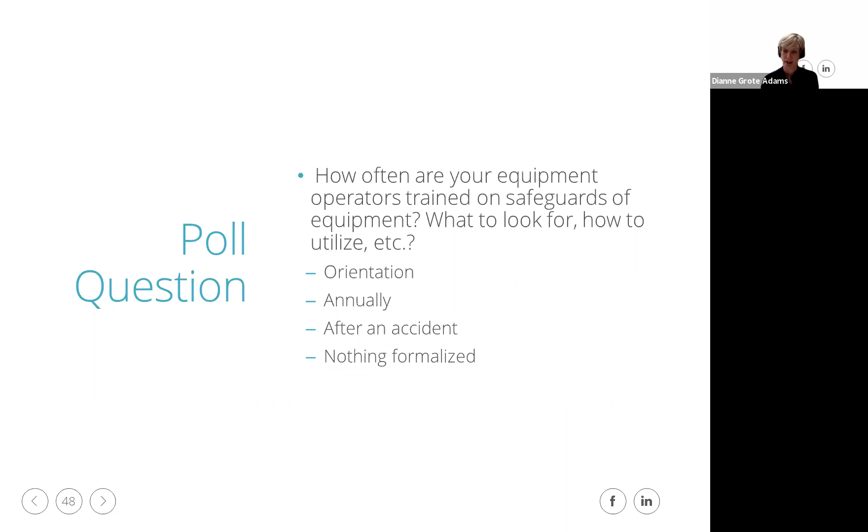All right, so what would you cover in that training? Well, who takes care of the equipment, and this is specifically from the Power Press standard, but I think it can be applied across the board to all of our equipment. Who does the maintenance on it? What's your role as the operator?

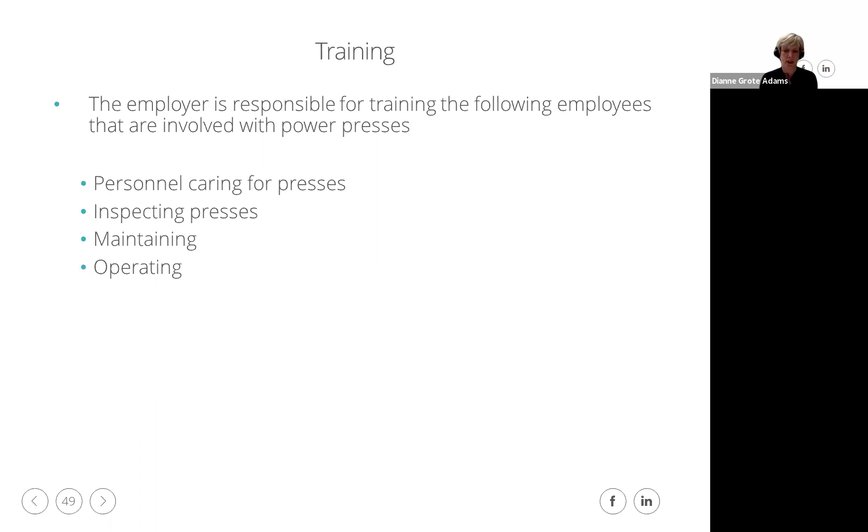Who's doing inspections on it? And when I'm operating it, what's my limitations or my interactions with guards? Should I be checking for guarding in the morning? What if a guard's not there? Who do I report that to? If I've got a damaged guard or a loose guard, who should I tell? Those kinds of things to make sure our machine guarding can stay accurate.

I would obviously make sure that our employees know what the best practices are, that we should only operate that equipment when the guards are in place. Don't remove a guard. If you need to do something in the machine that the guard has to come out, then you need to have some assistance with that, or we need to make sure we've gone through the lockout tagout process first. Those often go together. And then make sure we're not wearing any loose clothing, long hair, or jewelry.

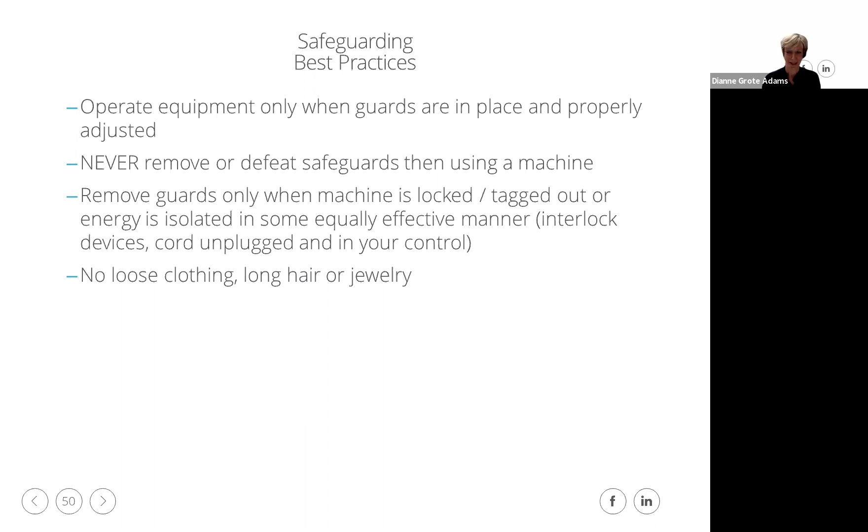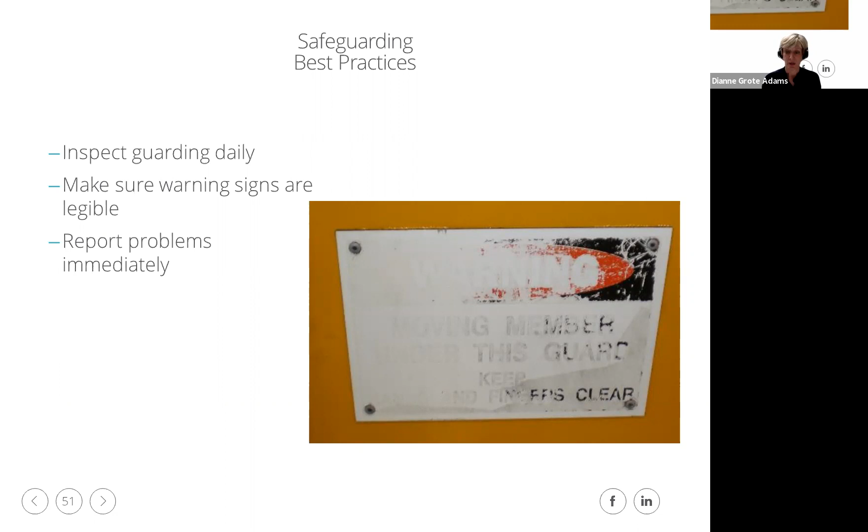Thanks, Deb. Deb reminded everyone, don't forget to include your new or modified guarding as part of that. Some of your best practices are: inspect your guarding daily. And if you are going to use signage, this is not ideal, right? Make sure your warning signs are legible and haven't been washed so many times that they're no longer apparent. Have a practice that if someone sees something wrong with a piece of machinery guarding, they're reporting that promptly and documenting it. Then make sure we're having a corrective action with a deadline to get that repaired.

So you know me, I like to challenge you. I know I just threw a lot of information at you. Hopefully it wasn't new for most of you. Hopefully it was just a good reminder, but there are some things to go and look at.

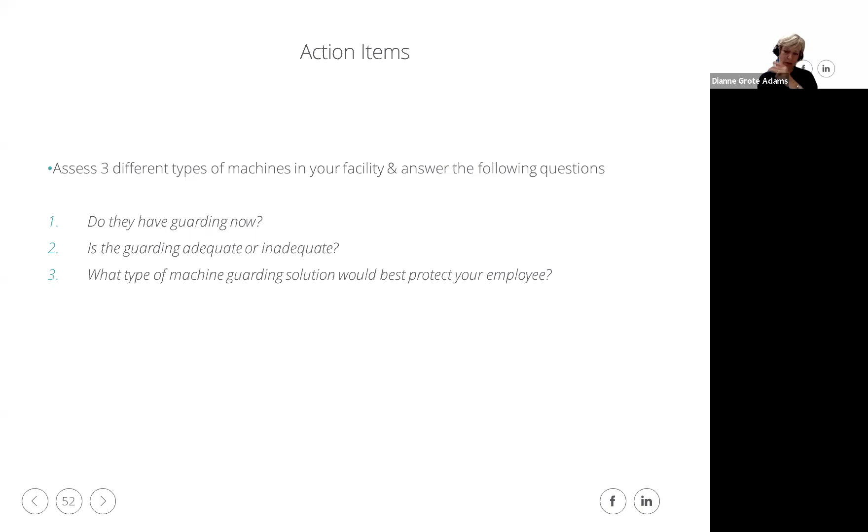Go find some machines in your facility today. How's the guarding? Are they guarded? Is it adequate, inadequate? Look behind - can I get my fingers in? Is it far enough away from the point of operation? Is it in good condition? Are my signs good? All those things we've been talking about. And if it's not ideal, is there a better solution that's going to protect your worker? So even if you just go look at 3 machines today, it'll be better than not doing anything about this.